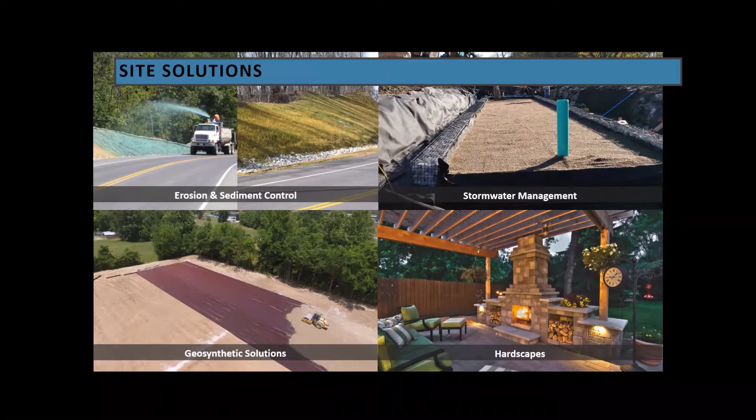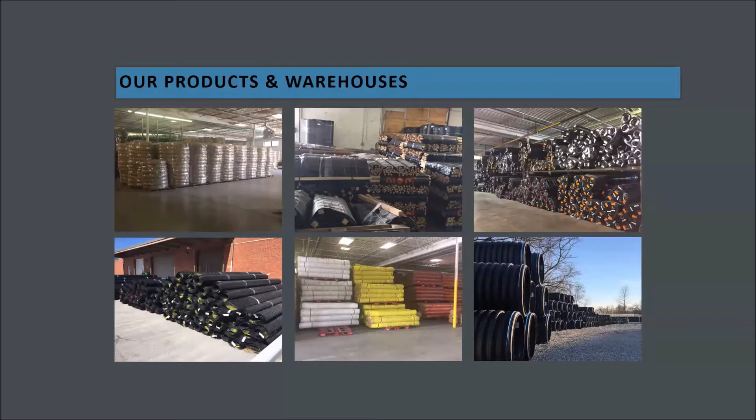In fact, I just talked to our owner yesterday morning at length about adding some of these new technologies, such as StrataVault that we're going to get into today. And we're trying to stay at the tip of the spear, as I call it, on stormwater innovation and just construction site innovation in general.

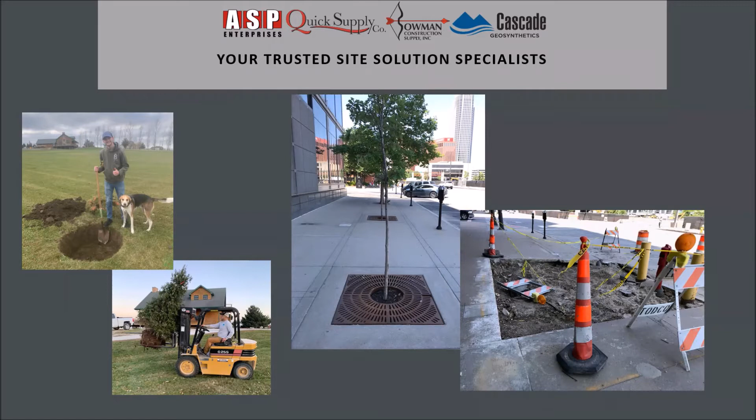That's bothered me for a long time. So it's only been natural that we would have a solution to help with that. And I'm going to introduce our guest speaker now that I'm 5 minutes into it.

I have his bio. And if any of you have ever bought a used textbook in college, you try to buy one that you hope came from someone smart, so you could just read the highlighted parts. So I print all of our guest speakers' bios, and I only highlight the part I'm going to say. But I like this guy's bio so much, I'm going to read the whole thing. So Steve, are you on there? You can unmute yourself and be ready. So that I'm here for you. There you go. You can give some feedback of appreciation when I read this bio.

So that voice you just heard, you're going to hear a lot more of it, is a landscape architect by the name of Steve Lovering. And his official name is Steven when you get his business card. Steven Lovering is the North American technical rep for Citygreen, the world's leading supplier of sustainable urban landscape solutions, including structural soil cells, tree root management systems, water harvesting and aeration products.

As a lifelong horticulture and design enthusiast, Steve has always had an interest in watching landscapes unfold. It was a somewhat natural path that would lead him to changing the world one streetscape at a time by helping trees to thrive in urban areas where currently they are failing, as I showed in the previous slide. We've all seen it. It was during his time as a landscape architect at LA West in Calgary, Alberta, that's Canada, folks, that Steve realized trees in cities weren't performing as well as they should. When it came to tree root management, water supply, and aeration, existing products were falling short.

A better solution was needed, so Steve decided to join his colleagues at Citygreen North America. Citygreen was founded in 2011 with a vision to revolutionize the green building space with highly engineered urban landscape systems. As well as enabling trees to reach their full potential, Steve wanted to help develop systems that would integrate seamlessly with infrastructure and services and be 100% sustainable.

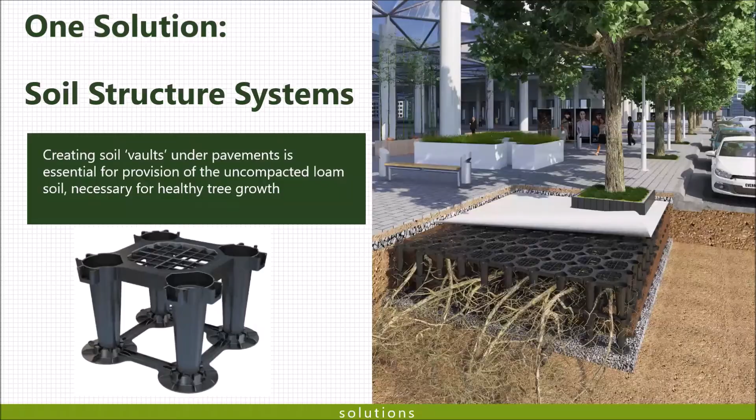So this is our system here. This is the StrataVault module. As you can see, the picture on the right is a really fantastic way of describing how these systems work. So they sit underneath the sidewalk, or in some cases underneath the road, and they provide lots of soil volume, lots of void space for soil. Now, these systems are planted around the root ball, and the tree's roots can now grow into these systems and really use all of that nice nutrient-rich soil for growth.

Now, the root system expanding out like this also means that the canopy can expand and give us the aesthetic, shade, and health benefits that we need. So this is really the guts of the solution here. It's a structural plastic module that's going to support the sidewalk, and the void space inside it is key. The soils that we use are key. We can use it for tree growth and also stormwater, which I'm going to go into in a little bit.

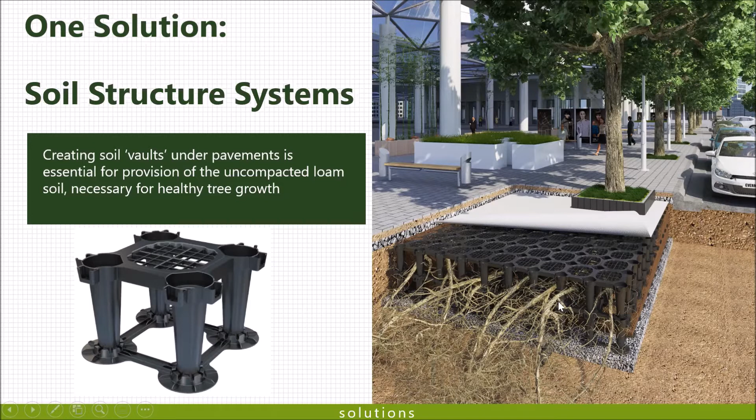Now, there's some features and benefits to the StrataVault product, and we're very keen to get Cascade and Bowman and the guys supplying this product. Obviously, there's going to be lots of benefits locally, like the stocking of product, the return of the product, some of the cost advantages as far as contractors being able to use terms and everything else. That's all very good, but the actual product itself, its main benefits are strength, workability with underground infrastructure, environmental impact, again 100% recycled, and zero maintenance. These products have zero maintenance, which is always key for municipalities.

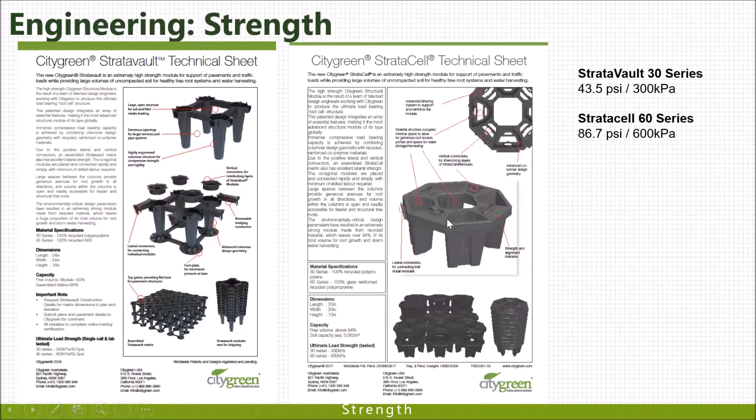Now, these are the two systems that we're currently supplying. This on the right here is a Strata Cell. This product on the left is a StrataVault. This is our 6th generation. The Strata Cell is our 5th generation. Basically, for different uses, the Strata Cell on the right is used underneath highways, and the StrataVault is used basically everywhere else.

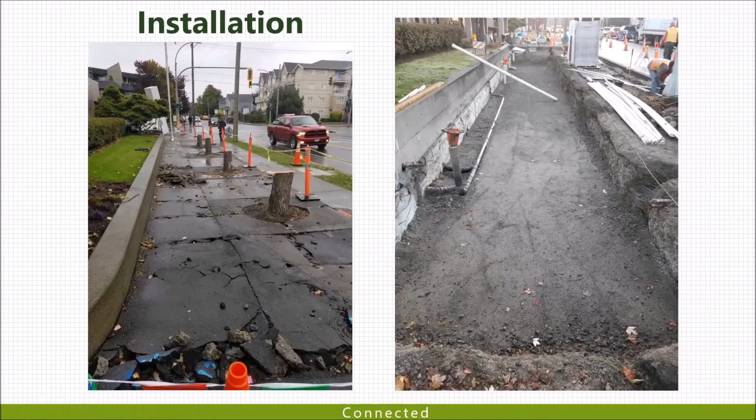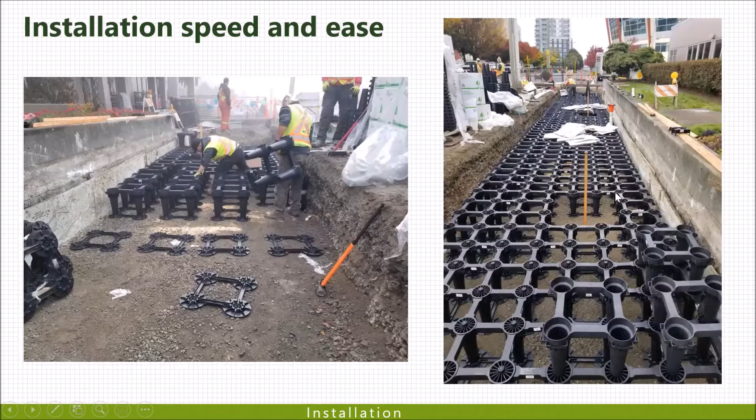And the image on the left here is 2 modules high now. This is the complete system in here. This is as high as we're going. And this product down the left and the right, I'm sure you're all familiar with geotextiles. These guys do actually sell this product. This is called FilterGrid. This product goes up the sides of the modules. Once this is all filled with soil, this geotextile will actually wrap over and come on top. And I'll show you that in a second. Again, here's the squares for the root ball where the tree goes.

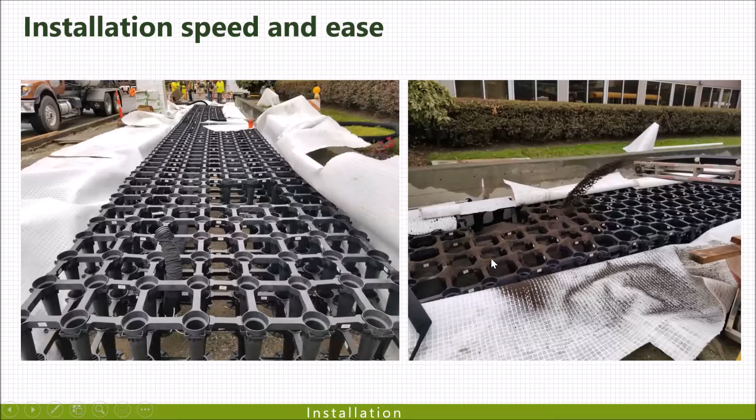Okay, so the image on the right now, the soil cell matrix is getting filled with the soil. This gets completely filled up to the top, and then contractors simply walk across the top of it to compact the soil. And now, as you can see, the StrataVault matrix is complete. The top grates are in place. The soil is all in. And now we can fold the geotextile membrane that's gone up the sides over the top, overlap it by about 12 inches. Okay, so this is pretty much the finished article here.

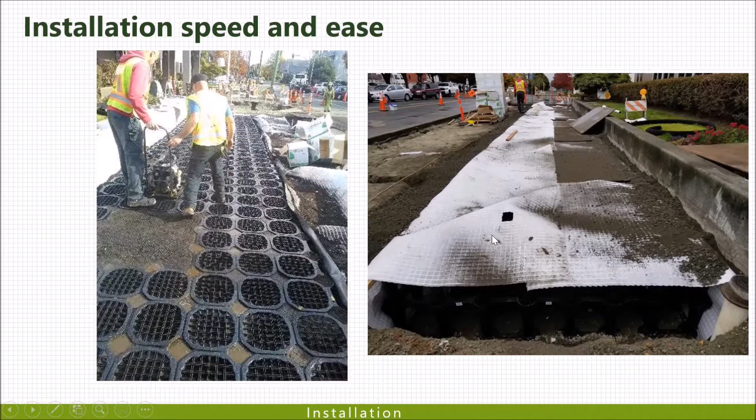Again, this is going under the sidewalk, and now the next step is to add the crushed granular base on top. Again, compact this to 98% or whatever your local regulations say. And then once the crushed gravel is all compacted, we very simply pour the concrete onto the surface, and that's our finished installation. So to discuss this again, the benefit of these StrataVault modules is they are underneath this whole concrete space here, and the tree roots from these trees can now use all of this space for their growth. Meaning, again, this tree's canopy is going to be huge. It's going to be a really healthy street tree, and we can run stormwater through it as well.

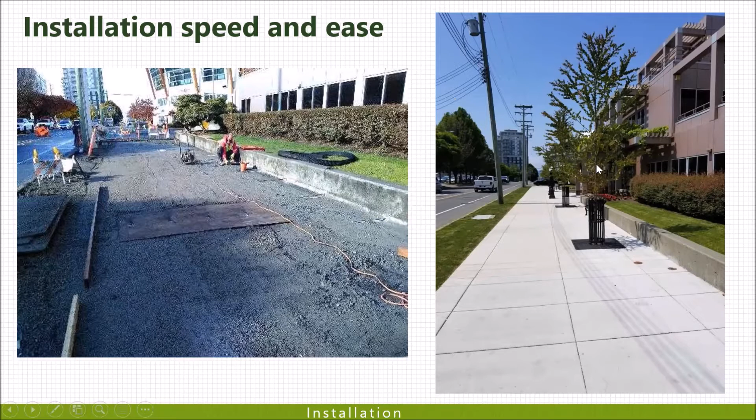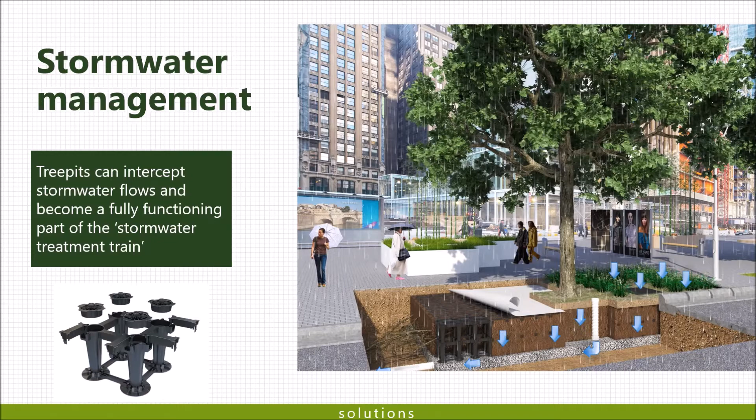Okay, so the last few slides there have been on tree growth and the health of the street trees in an urban environment. Now, these next few slides are a little different. We're talking about stormwater management, and there are already systems out there on the market that do this, but there's none that do this quite like the StrataVault module. It's unique in that the product can be left completely void for stormwater storage, or it can be used with soil in it, which is what we're going to be discussing today. So the concept of these tree pits for stormwater management is this.

This here is a typical catch basin. Typically it's next to the curb. In this instance it's not, but it doesn't matter. So if this is next to the curb, the water's running through the catch basin, and it runs through this pipe here and into the soil cell matrix, which is full of soil. Now what the soil's doing is it's taking all of the water that's coming in from the street, and the soil is actually going to take out the pollutants like the oils, petroleum, metal pollutants. It's going to hold all of that up, and the water is going to sieve through the soil, and if these pits fill up, it's going to go into this drain here, or this pipe, which is going to take it into the city's systems or lakes, oceans, ponds as clean water.

So this is a very natural way of cleaning the polluted stormwater that's coming from the streets with these tree pits. Now, of course, the other benefit, aside from clean stormwater, is that these tree roots are all within this tree pit as well. And the tree's roots are going to take up the pollutants and use them for its growth. At the same time, the water is going to be in the soil cell matrix as well. So we're feeding the trees and we're cleaning the water. It's a really fantastic solution.

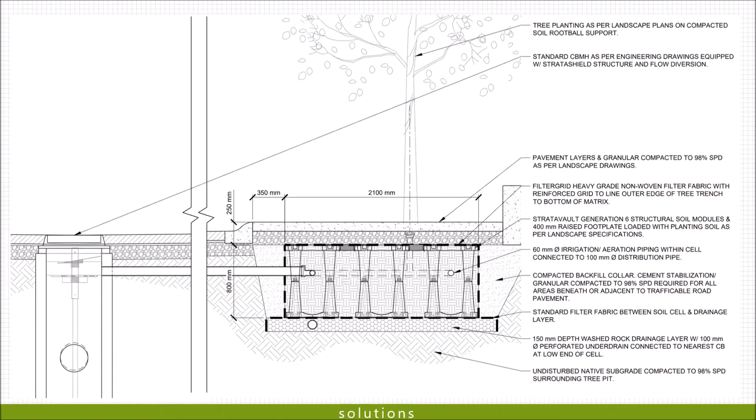Now, I almost want you to sort of close your ears a little bit for this next one, just because I'm going to go into a product that we've developed called the StrataFlow Shield, which is going to be again supplied by Cascade and Bowman and all the other partners there. And the water is going to come in from the top of the catch basin, down this product here, across and into the pipe.

Basically, what the system is doing is taking out the silts prior to the water getting into the cells. So for many years, these soil cells have been used for cleaning the polluted stormwater. But of course, from an engineering standpoint, engineers are concerned about the pipes, etc., clogging up. Well, now that's not a concern anymore, because we're cleaning up 90% of the harmful silts before the water hits the pipe and gets into the soil cells.

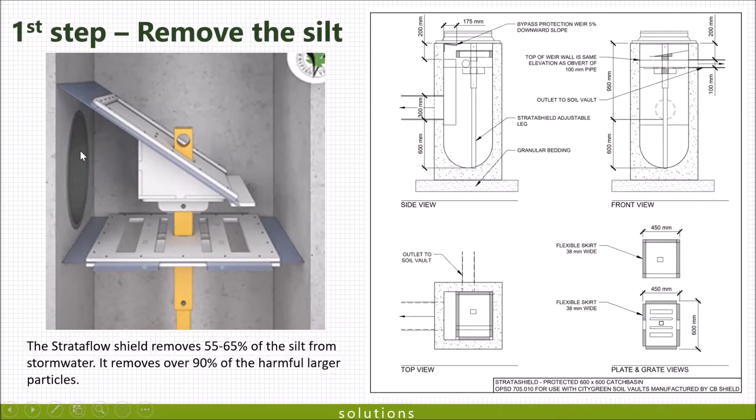And maybe what we'll do is, if anybody's interested in this other product, because it's a different product to the StrataVault, but the two combined are producing water quality that's never been seen before in the urban environment. It's taken us 3 years to get to this point, but we're really, really excited. And again, for all the stormwater civil engineering folks out there that find this part really interesting, let's set up another presentation and we'll really get into the guts of it. Because today is really more about urban tree growth with an aspect of stormwater management there as well.

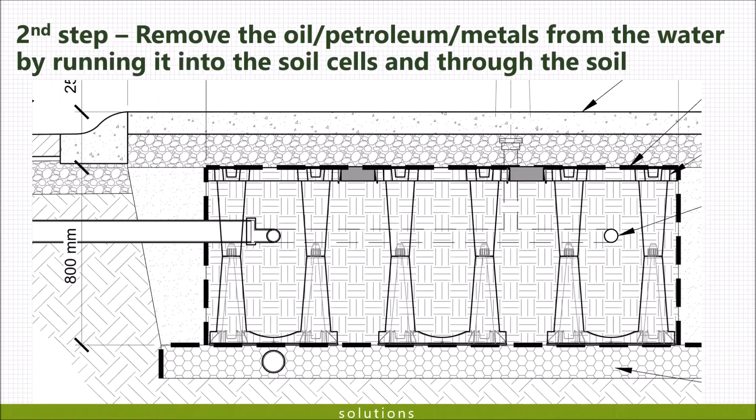So this is a concept again from a plan view. Let me just, okay, I've got my mouse back. This here is the catch basin, okay, at the curb. And then the water is going to run in from the catch basin via a pipe, and then this is a perforated pipe system that we've put into the soil cells, into the matrix, which is going to send the water around for the tree roots to really get into.

The good thing about this particular design is that any salts that we use, I mean, some of you will be using salt, some of you won't be using a lot of salt. I'm up in Canada, and in Canada, salt is a massive problem. And if we're sending salt into a root ball, then we've got real issues. So we tend to send the salt in with the water into spots so it can collect, and the tree roots simply divert away from the salt. It works really well.

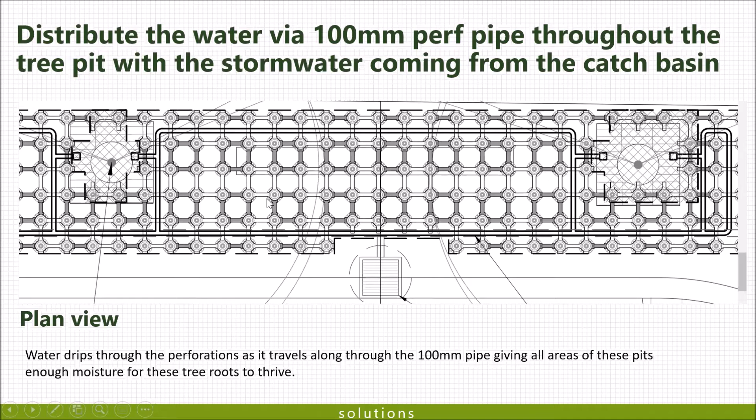Okay, so this is another area of soil cells, and this is focused towards the engineering folks and the people that deal with utilities, pipes. We've developed a product called Strata Cage. It's very simply our StrataVault product with a root barrier in there as well. So this Strata Cage is designed to organize and compartmentalize pipes and utilities underground. So engineers are now specifying our system and using them to organize all of this underground infrastructure within 1, 2, 3 layers high of the StrataVault.

This project's a really good example. This is one that we've done in the States, and we've got 3 different things going on underneath the sidewalk that are benefiting the trees, the engineers, and the stormwater engineers. So the bottom layer is filled with granular or rock of different sizes depending on the flow rates for the stormwater. Okay, so the bottom layer is all purely for water that's going to be running in, and we're going to be slowing water down and then sending it again into the city systems via these pipes.

Okay, the second layer is for pipes and utilities. So again, we've got this little section here. This can be anywhere within this matrix. This is all for organizing and compartmentalizing the utilities. And then the third layer up is purely for trees. So it's for soil for trees. So this is actually a 3-tier system. Again, the organization is fantastic, and engineers, it took them a while to get on board, but they're now actually specifying the product so that they can really work with the different parts and components of a streetscape.

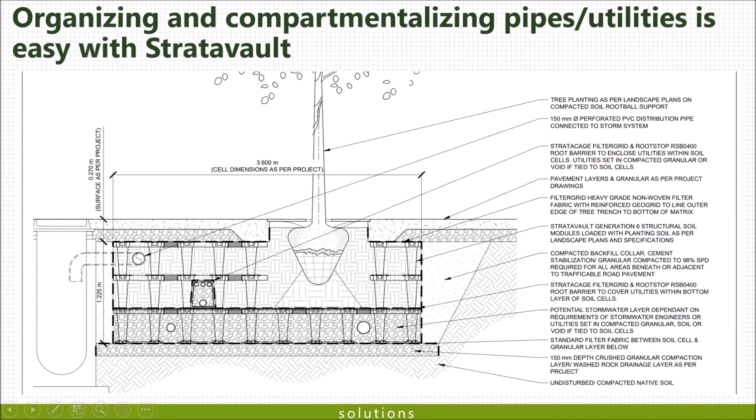Now let's get into some sexier stuff. Here's some projects that we've done. This is a project in Edmonton, Alberta. This is in Canada, and I just wanted to put this one in because this is using stormwater that runs through these grills into these tree pits. The soil cells are underneath the red paving sections here, right below the trees.

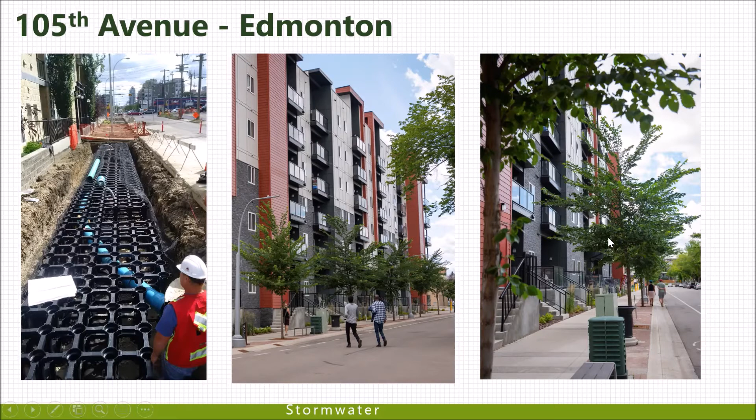And again, these tree roots can now grow all the way down this sidewalk. And this is actually phenomenal growth for these trees. This is a 3-year-old project, and for Edmonton, Alberta, they don't get massive trees, to be quite honest with you. They're seeing phenomenal growth, and the caliper on the trees growing substantially too.

This is another one in Edmonton. I thought this was really interesting because these trees are planted in parking lots. So this is all asphalt, obviously, around these trees. The soil cells are underneath the asphalt, and they've got channels put into the asphalt that collects all of the stormwater from the parking lot, and then the trees are using the stormwater for the growth.

Now this one's particularly interesting because these trees are planted at exactly the same time. These trees are in what's considered a lot of soil, really. It's not a field, but it's certainly a decent quantity of soil for it. And these trees are outperforming these by quite a way. They're bigger, they're fuller, they look a lot healthier. This is the same tree species. These are elm trees, which again, we see a lot of these in the prairie provinces.

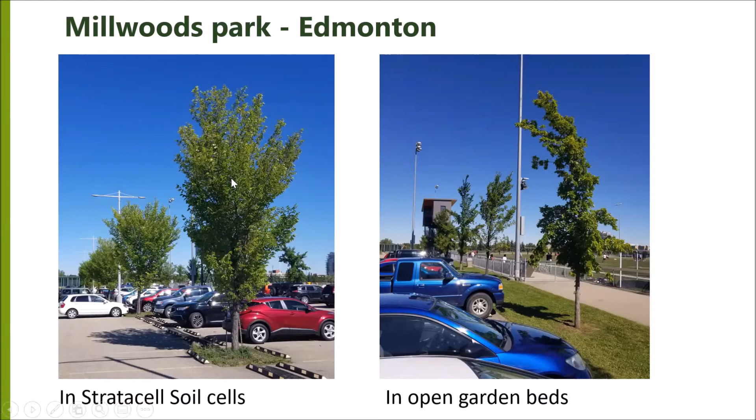And this is the largest stormwater project in North America. This is a light rail transit project that we've done. Edmonton is a hot spot for these soil cells, but the soil cells are actually within this trench here, and there's actually no trees, nothing getting access to these.

The reason that they were put into the project is so that the stormwater engineer knows exactly the quantity of soil within these soil cells, within these areas, so that he can do his math and figure out the runoff, the flow rates, and everything else. So again, super interesting, completely different use of soil cells than we're used to, but there's lots and lots of different applications.

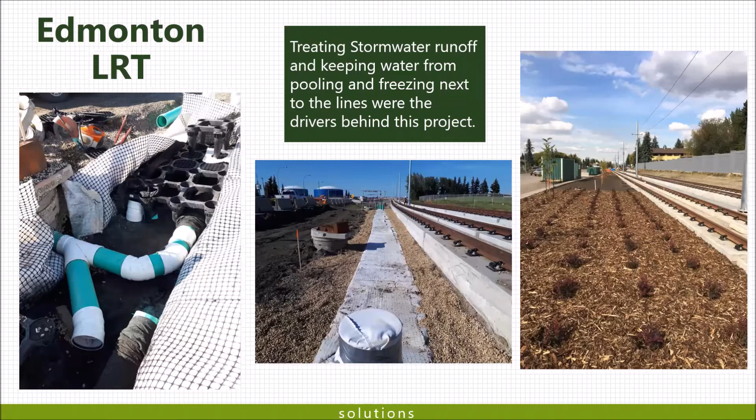This is our best project to date. This is 2013. These trees were planted into our soil cell product. Architecturally, this small town has got lots and lots of visitors coming through it. Trees are really very important to the look and feel of this town, and they didn't want to just put trees that were going to die after 5 years back in, because it would do nothing for tourism. So they planted these trees in our soil cell product back in 2013.

The trees are twice as big as the full-grown trees they pulled out, and they're continuing to grow, and everybody's very, very happy. And again, if you guys have got main streets that you're looking at doing projects on, these systems are really fantastic for it.

This one's in Winnipeg, very, very cold climate, -40 degrees. So I'm talking foreign language again. Anyway, it's probably colder than any city you've got, even up in the upper echelons of the States. It's the coldest major city in Canada.

And Disney use our system for all of their projects in Florida and California. They love the system because, again, it protects the surface in the sidewalks, and it gets really nice tree canopy shade. As a lot of you know, there's long lineups for these rides in Disney World. Maybe not at the moment, unfortunately, but typically there is, and the shade is incredibly beneficial for these parks.

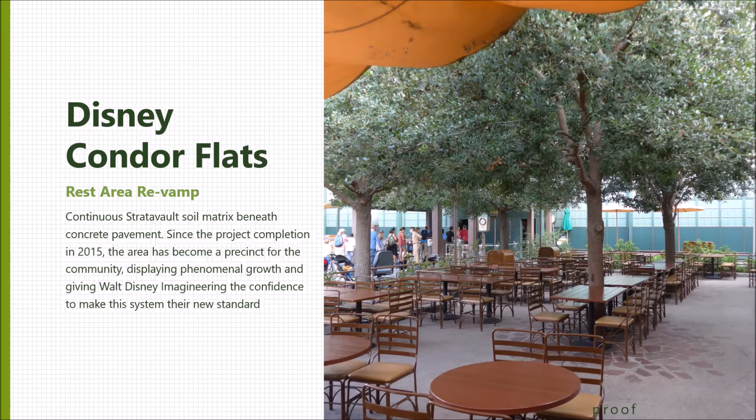And Vegas, we've just finished 2 projects in Vegas. Obviously, they're short on water, so capturing every drop of water that they can is very beneficial. And again, the heat thing, massive trees in the city, they're all about it.

So here's something for the municipalities to look at and take note. The tree on the right was planted 4 years ago in 1,000 cubic feet of soil. Now, this tree's value has gone up from $600 US to $17,500 US in 4 years. Now, some of the cities where you guys are today maybe won't put a return on investment value on the trees quite yet, but believe me, it's coming very quickly to every city across North America. Some of the cities in the States already have this, have had for years.

And if a developer wants to come in and put a development in and they want to take a tree out, the city says yes or no. If it's yes, Mr. Developer, you owe us $25,000 for this tree. It's a way of the city getting some of this money back for green infrastructure.

The tree on the left has been in there for 15 years. It's a very sad state. It's actually lasted a lot longer than maybe a lot would. But this is what we see across the States. This tree is providing nothing in terms of aesthetics, shade, health benefits. It's just there. It's a pathetic little thing. All too common, unfortunately. But that's what we're going to change with this product.

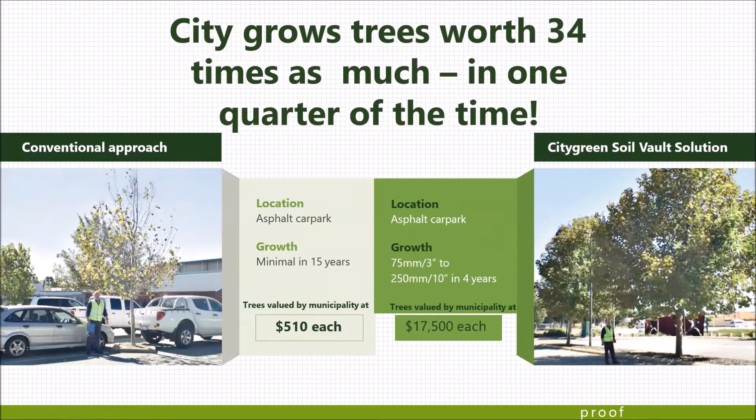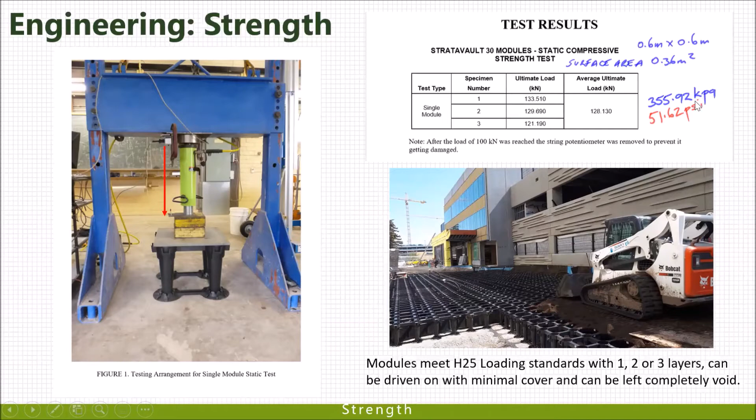Just to go into some benefits, the StrataVault product is extremely strong. We can have, in some cases, machinery driving across the top of it. This on the left is how we strength test these modules. So we put them into big crushing devices. We squash them basically until they break or bend or explode, and then at that point we come up with a PSI, or in Canada the kPa, kilopascals, obviously pounds per square inch. That's how we test these things.

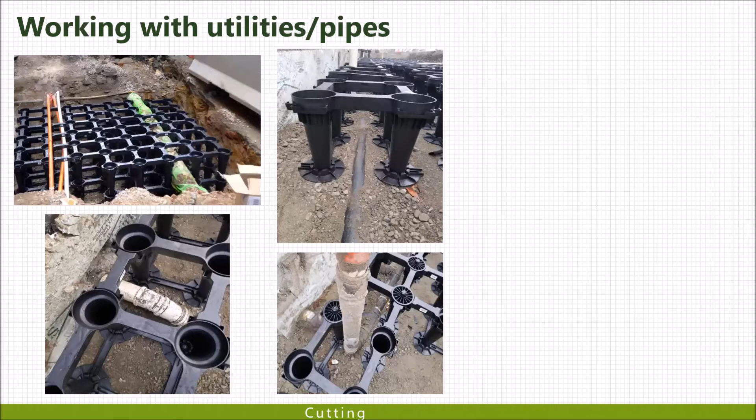We've got these utilities and pipes that we like to work with. This project here on the right was strewn with utilities pipes. As you can see, catch basin, there's all sorts of problems in here. The landscape contractor turned up and says there's no way we're going to be able to get soil cells into this. It's a maze of everything. We do projects in Europe, where the streetscapes are 700 years old, 800 years old. The pipes and utilities underneath these streets are unbelievable. They're a maze of pipes.

Because our system is so flexible, we can cut the StrataVault module without compromising strength, which means we can get into 99% of these projects and put our system in. I'm sure that, again, there's a lot of cities where you guys live where you're thinking, oh, there's lots and lots of pipes, infrastructure underneath our streetscapes. We're a little bit concerned about that. I can tell you now, don't be concerned about that for 1 second, because we have yet to have a project that we couldn't get into and provide all of the soil volume. For example, the projects on the right, we've got 5 big healthy trees into that space. So it can be done. And we've got lots and lots of projects that I can show you and send you with that information in there.

Again, 100% recycled product. Last year alone, we saved over 1,000 tons from landfills and oceans. We're actually very close to our product being recycled in 100% post-consumer plastic. So it's very, very exciting. Which means all of those bottles and milk jugs that we throw away every day, we put into recycling bins. That's what we're using to manufacture our product.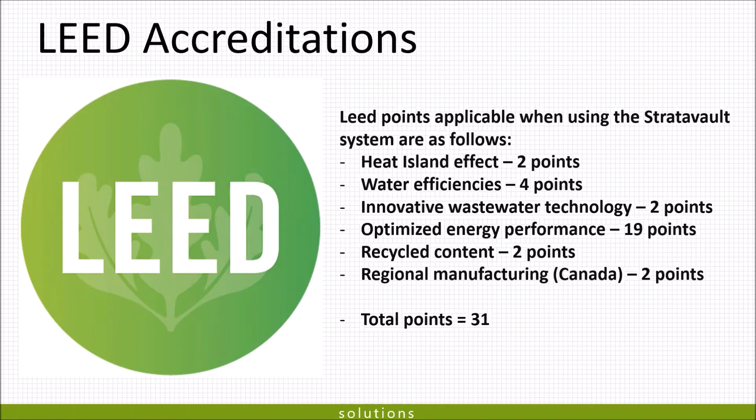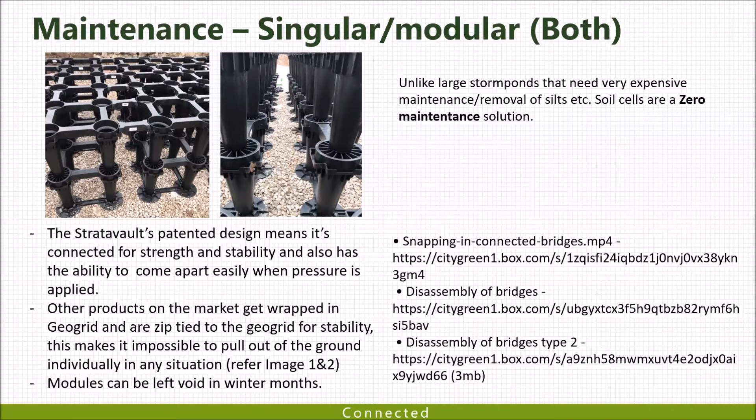Yeah, LEED. We can get up to 31 points for your LEED projects by using these systems. Obviously, with ours being recycled as well, we're getting a few more points for that too. And zero maintenance. So once we've got this product in the ground, the trees planted, we can cover these things over. We never have to be concerned about them again. The trees are going to keep growing, and that's usually very good for the municipalities to hear.

The biggest benefit of going with our product in your neck of the woods is you've got local support and distribution. You've got stock on hand. The contractor can return stock. These guys are trained up in installation. They're going to be able to get out on job sites, make sure the job's going well, potentially sign off on the project at the end of the day as well, and constantly provide education like we are doing today. So fantastic, you've got companies like you have.

Also, we can help. I'll touch on this quick because I'm running out of time. We can help with... You're doing great on time. Keep on trucking. Yep, you're doing great.

Fantastic, thank you. Design services, guys, we can really help with this. This is really, really important. If you're coming from a landscape architecture firm or a city or whatever else, and this is obviously a brand new concept for some of you. Some of you have seen it around a lot.

We can really assist you with where these things go, show you how many cubic feet of soil you've got per tree. And also show you as well, hey, why don't we connect these soil cell pits to some open planting beds and cut down on the cost a little bit as well. There's lots of things we can do.

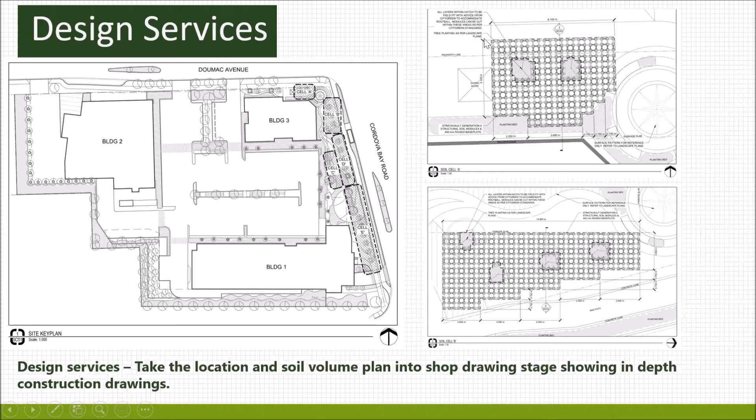We can then take those design services a step further for you as well and show you where the matrices are, but also zoom in and hone in on how exactly they look. And again, how much soil volume have we got per tree? And what does that outside excavation look like? And then again, we take it a step further again.

It is the strongest module in the world. The workability with underground infrastructure is fantastic. I can't tell you how flexible and easy this product is to work with. Again, we can cut it without compromising strength if we need to, but typically we don't need to. It's just a case of using or not using the bridge connectors to space the modules apart.

Again, we can put the design together for you. The guys at the 4 companies that we're talking to today can be on site with you as well, talking you through it. And we provide obviously lunch and learns for offices outside of this as well. Environmental impact, I keep touching on that, but maintenance is key. It really is fantastic that we just literally plant these trees in the ground, we cover them over, we watch these trees grow, and we have a thriving streetscape or plaza now to use.

Urban Greening Grant Program. So this is something that we've been talking with municipalities about, and this is something we'd love to work with all of you. If you've got a potential project coming up and you want to look how to use one of our grant programs, then we can absolutely help you with that. Again, it involves us assisting with the design, and then all we want to know is that, you know, the grant program's working, and how we do that is we plant a tree in the typical way that we have been doing for 30 years within the area of the soil cell trees, just to get a visual on, hey, look, is it working, is it not?

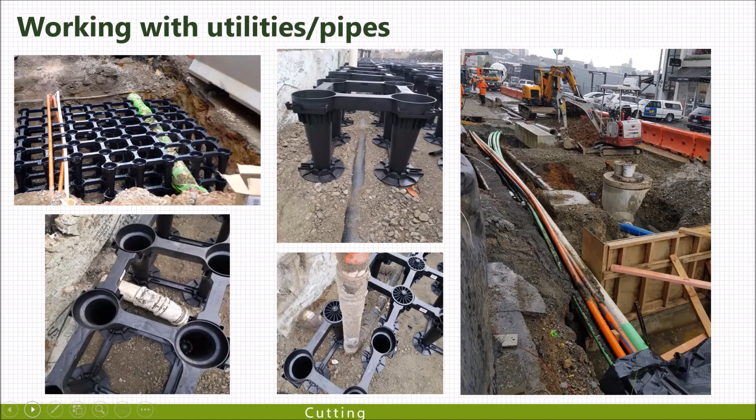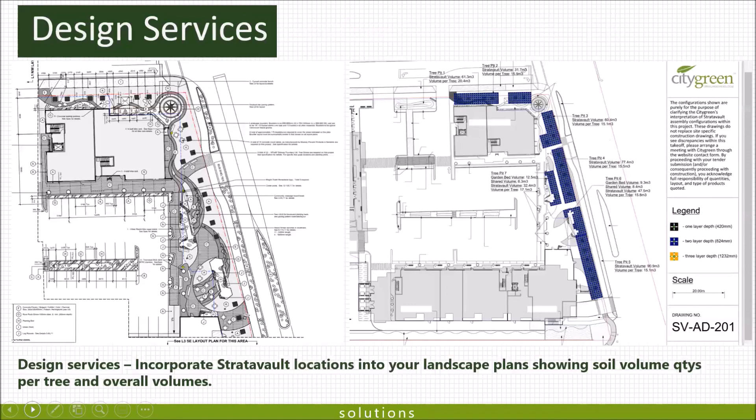Oops. That's me. I'm clicking the slides. I was looking for it, but yeah, go ahead.

Yeah, the StrataVault 45 is just over 65 PSI, and that means that this product can go underneath roads, even in some cases highways. So yeah, we've got no concerns at all around any vehicle or traffic going over it. And we'll help them with that when we get to that point.